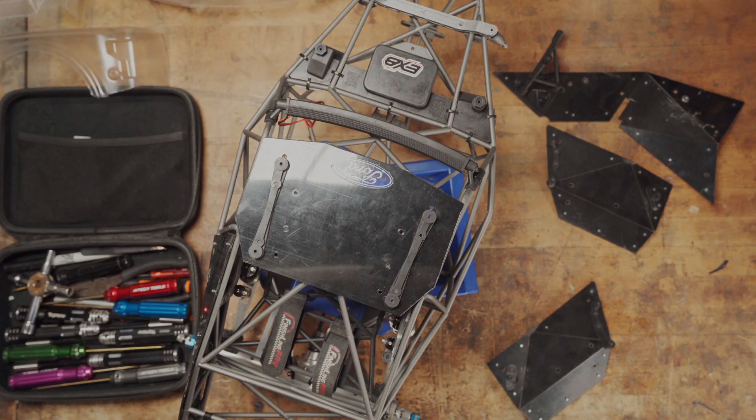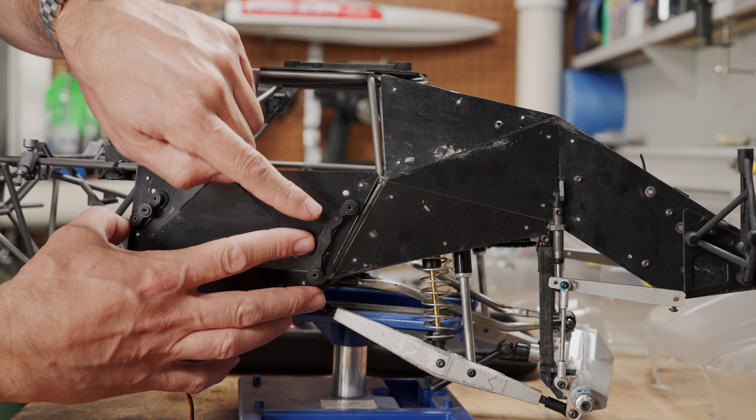Today I'm creating a middle support for the rear bedside fenders. I have the one in the back, which hopefully you've seen in my last video - if not, I'll post the link in the comments section below. And I have the one up front, more in the middle of the chassis, which mounts the cab to the cage.

But because I had to trim the body to fit my truck, I cut out all these pieces here. I'll show you in the camera above - the little intermediate mounting point got hacked off.

There are 3 major steps in my process when creating a custom 3D part for the truck. The first step is to figure out exactly where the part needs to be located on this physical surface. I need to take some basic measurements of the physical truck, so that when I move on to step 2, which is creating the 3D piece in my modeling program, I can base the measurements of the new part on the physical truck that I measured, and not the one I created in the computer, since they are slightly different.

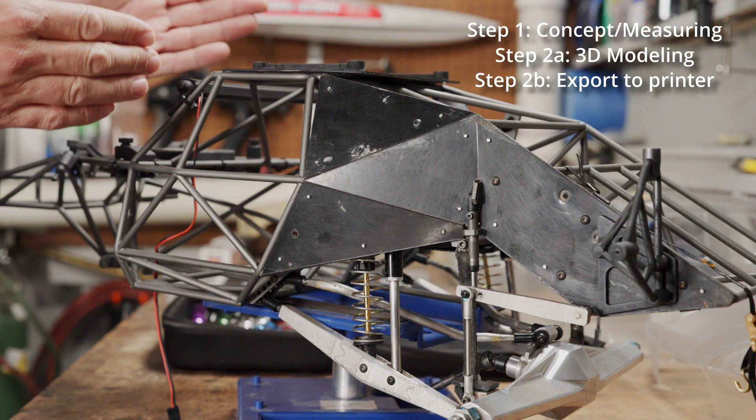Once the part is fully modeled and I'm happy with the result, I can move on to step 2b, which is to export the model from the modeling software and import it into the 3D printing software - it gets a little muddy, but stay with me here - where I create the necessary support pieces for the 3D part to be printed. That's something I'm sort of learning on the fly, and I'll try to describe that in step 2b.

From there we head back downstairs to start step 3, the 3D printing process. But before any of that can happen, I need to remount some of the black plastic panels and the body so I can measure exactly where that part needs to go.

One of the things I didn't talk about in the last video was how much longer the wheelbase was on the Baja Rey versus the Yeti Score truck. Obviously I couldn't extend my wheelbase a full inch or whatever the difference was, so I ended up doing a half inch.

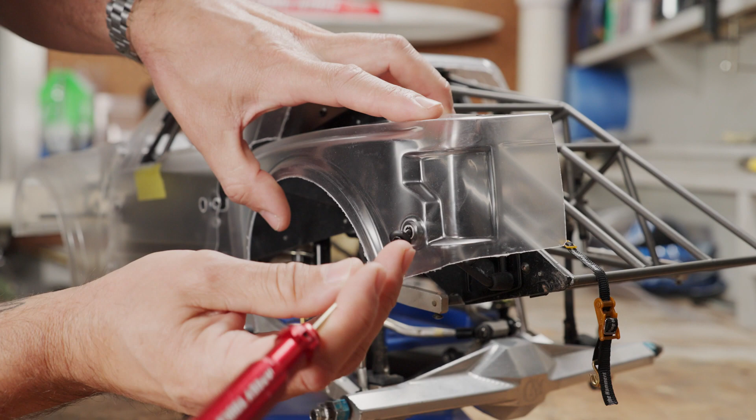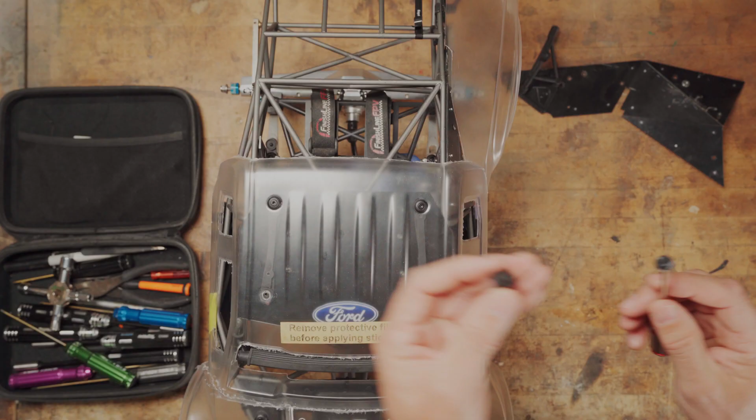So you may or may not have noticed in my last video that I don't have a specific bracket down here. What I ended up doing is take this little piece which used to be part of this top bracket, I snapped it off and I'm using it as sort of the nut behind this screw to keep the body panel secure. I didn't think it really needed a physical mounting point against the black panels. It seems pretty solid.

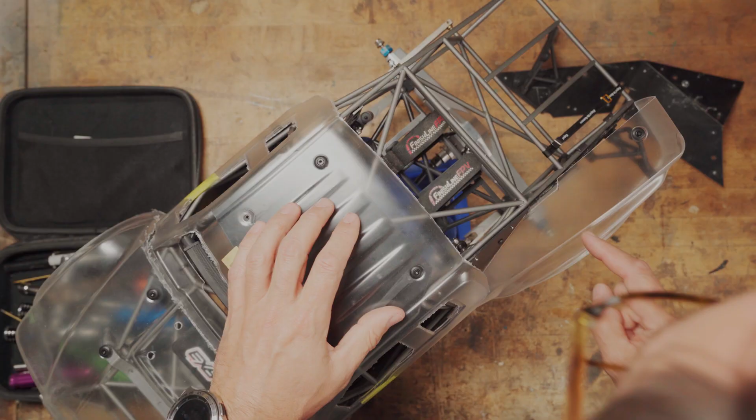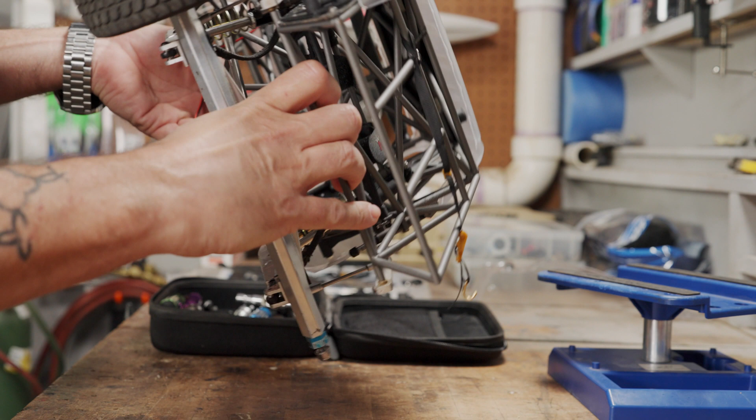So the body is mounted. Now we need to figure out exactly where this guy should be. I'm thinking I should probably put a wheel on to make sure I don't hit whatever it is that I'm going to be mounting up here. Let's see. Need to make sure that the sway bar clears whatever it is that I'm creating.

This might actually be the right spot right here. It's out of the way of the sway bar. It can come off sort of at an angle, so it would do something like that. That's one option. The other option is to come straight out of here and go in that zone. Problem there is that I'm worried that whatever I make is going to end up hitting that.

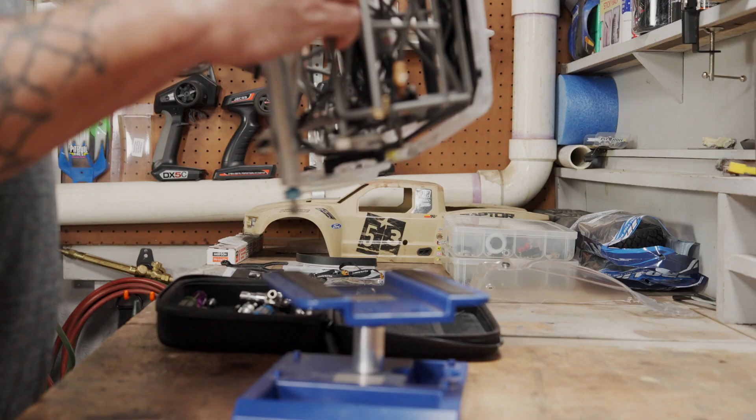I think this is the right one. I think that's a good spot. Let's go with that.

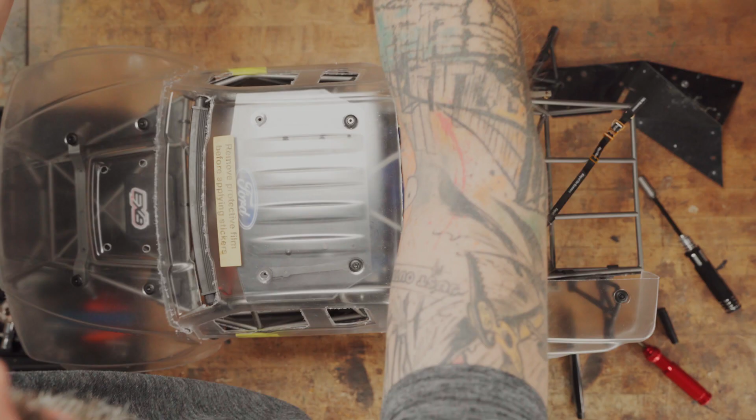All right, so let's talk about measurements. It's not going to be super critical because there's no specific hole that I have to figure out how to get to. These holes were already in the body, so it was important that as I developed the new piece, these holes lined up as close as possible, and same with all of these other ones. The only other two holes that I created new were these guys, but these were existing. The ones in the front on the hood are existing, and the ones on the roof are existing, obviously. So now I can create a piece that lands in this zone, and I'll just create a new hole. That should be easy enough.

So we're going to say it needs to be roughly 18 millimeters, 18 millimeters this way. And we're going to say it needs to be—pen's not working here—if that's the line of the crossbar, it needs to be roughly 17 millimeters from there. All right, simple as that.

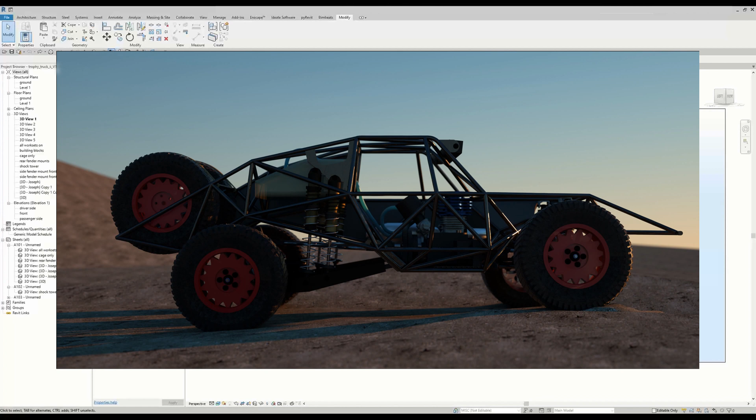All right, so we are up in the office, and for those of you who aren't familiar with this program, this is Autodesk Revit, Revit 19. This particular view was created when I was doing the early studies for the renderings I was creating when I was doing the design of the truck. If you haven't seen those renderings, I have them in one of my videos—I'll link it up at some point. Let's move over to a more utilitarian view.

So you can see I started to create some of these pieces, the newer 3D modeling pieces in here. Basically what I do is try to work in the truck file as much as possible so that when I create these new pieces, I can see how they lay out on the skin or on the black panels of the truck. For those of you wondering, I created every little thing in here. I even have a nitro engine that I downloaded from OS, and then I added all the gearing and so forth. This is modeled after Metal Concepts.

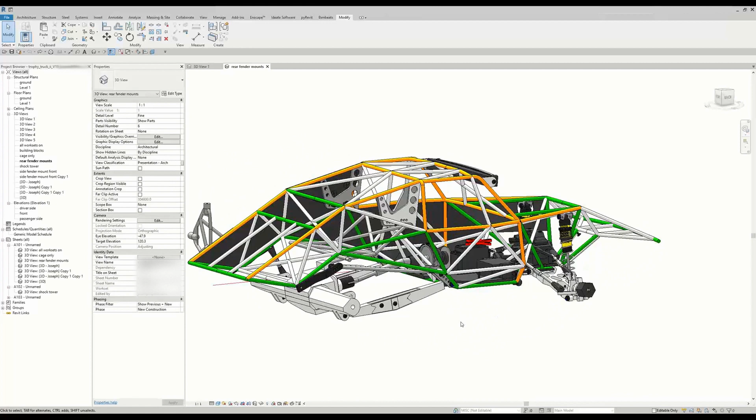This is modeled after some eBay front control arms. This is all modeled on pieces and parts that I bought as I was building the truck, before I even started assembling it in the wood dowel configuration. This was all way before that. I built the entire thing in the computer based on parts I had already bought, but I didn't actually have a working physical model yet—it was all done in the computer.

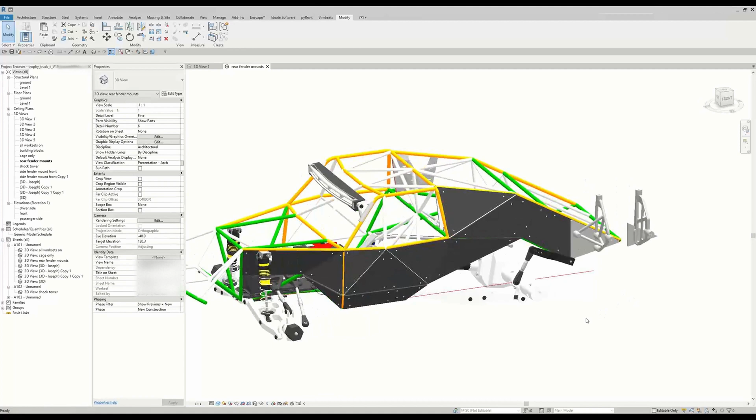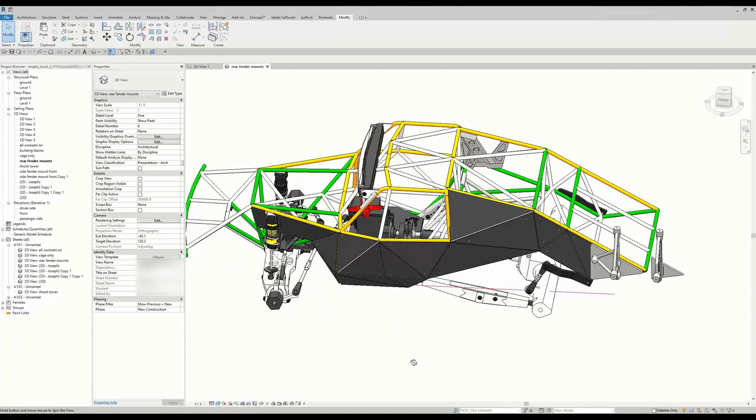Anyway, so let's quickly go through the process. This is going to be more of a demonstration, not a tutorial on how to create these pieces and parts in Revit. There's probably one other person watching this video who does Revit, and if that person is creating an RC trophy truck, feel free to reach out to me separately, but I don't want to bore everybody else with Revit how-tos. I will, however, go through my process.

If you remember in the first part of the video, we talked about the part being on this panel here. It's going to be 17 millimeters forward of this green crossbar. And then I remeasured it based on having the body in the position I want, and I want to go 20 millimeters off the skin.

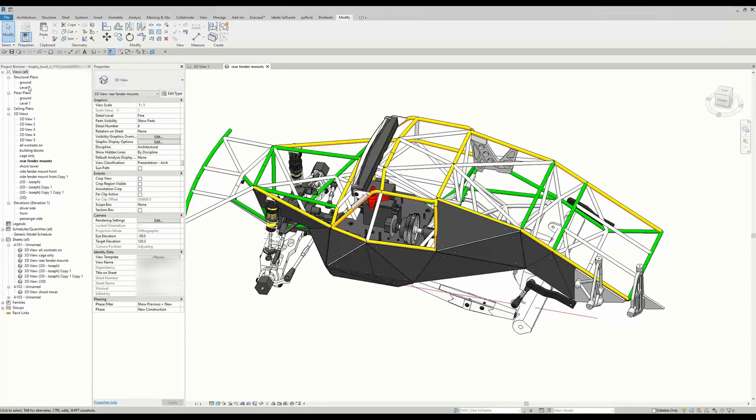But the first thing I want to do is give myself a reference plane to work on. So I'm just going to create a new component, which is what Revit calls their individual families or components, and it's going to be a generic model. We'll select this, and I'm going to do an extrusion so I can get a block in the model to work with.

I use it for various working planes, and I'll show you as I go through. Right now it's set to 3 millimeter high. We're going to do a 150 millimeter high extrusion, and we'll see how that looks once it's extruded.

All right, so we'll spin this guy around, look in the front. It's probably not a bad spot, but we can raise it up. Essentially, I was trying to get it where the body is going to sit. And you can see back here that this was sort of an early version of the rear bracket.

If you guys see my mouse, I don't have the cool app that follows my mouse, so you guys have to bear with me. I'm just recording this on GoToMeeting.

This was an earlier version and was really high, and you can see how high the panel was. I've lowered it down significantly since. I think the top of the mounting point is down at the bottom where it's shown here, so it dropped almost a half an inch.

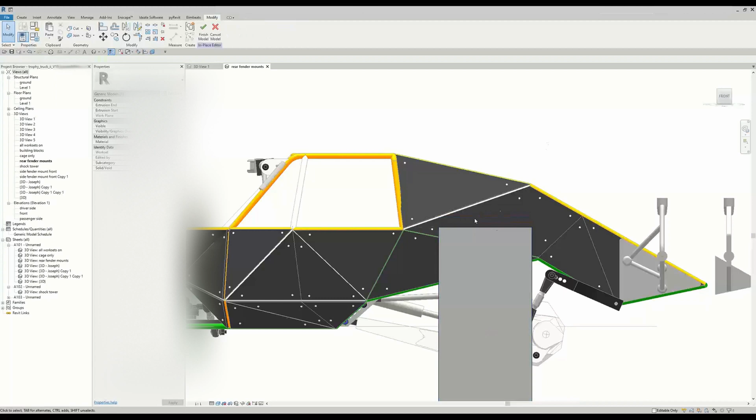So we're just going to hold this new bracket in this zone. Yeah, maybe we'll drop it down a little bit. I'm not quite sure I'm comfortable with that, but again, as we talked about earlier, it doesn't have to be really precise, since I'm creating a whole new hole in the body panel. So I just need to roughly get it where I want it to be.

So we can actually use the edge of this box and align it with this crossbar, so I know what the center of that crossbar is. Revit sort of snaps to it, for those of you who don't know.

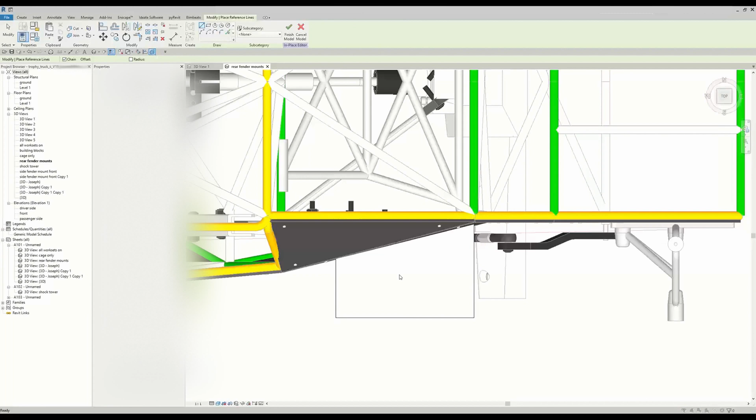And then the other thing I need to do is create a line, a couple reference lines. The reason I do that is so I can remember where I want to be: 17 millimeters forward, 20 millimeters off. And I'm going to create that reference line on this plane.

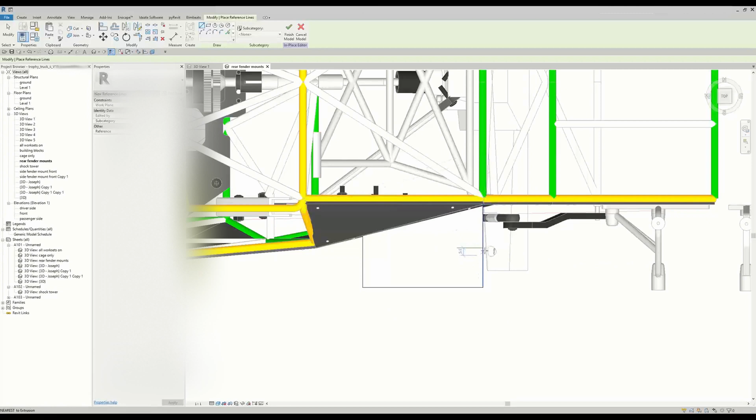So if you rotate, you can see I'm selecting this plane to begin to draw on. We'll go back to the top view, which architects and engineers call plan view. We'll create a new reference line, and that reference line is going to be 17 millimeters forward of that edge, or of the center of this crossbar, which is this edge of this block, square, cube, whatever.

Then the other thing I want to do is create a 20 millimeter perpendicular to that black panel. Now I know this needs to be 17, so I can actually move this 17 millimeters to that intersection, or to that endpoint, and then take both of them. Well, let's see, is that the best way to do it? Because I need to move parallel, so let's not do it that way.

I'm going to draw another one there, and then I can draw another reference line from here perpendicular to the one that's highlighted. Now I need to move this line to that intersection. So now I know that the end of this line, which is 20 millimeters off the black panel, is 17 millimeters forward of that green tube.

So let's draw, I think what we'll do is draw a little circle here at that intersection. That's the hole that I need to drill in the new bracket, or the hole I need to create in the new bracket where the body is going to mount up.

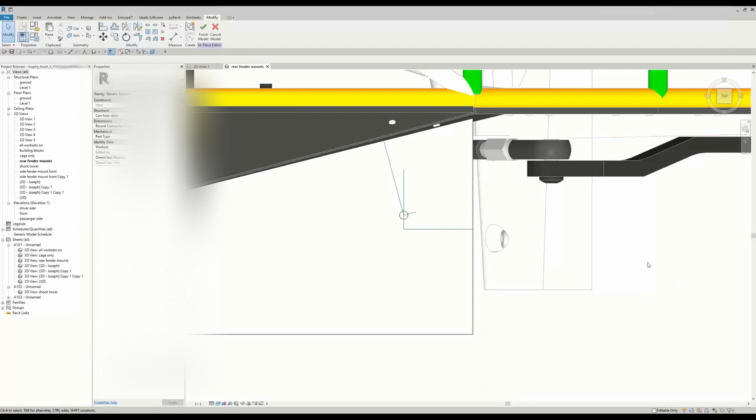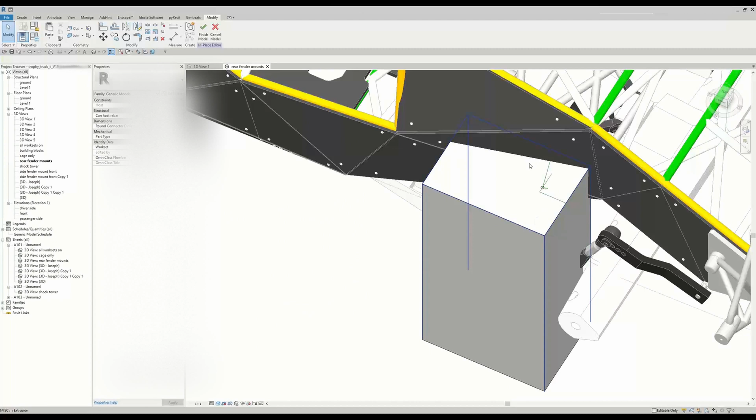Hopefully that wasn't too confusing, a little convoluted, but that's just the process on how I create these things. There's a lot of other programs out there like SolidWorks, Blender, I'm sure there's a ton of other things out there, but this is what I know, this is what I use, and I'm pretty efficient in it. So that's just the best way for me to actually get this stuff done.

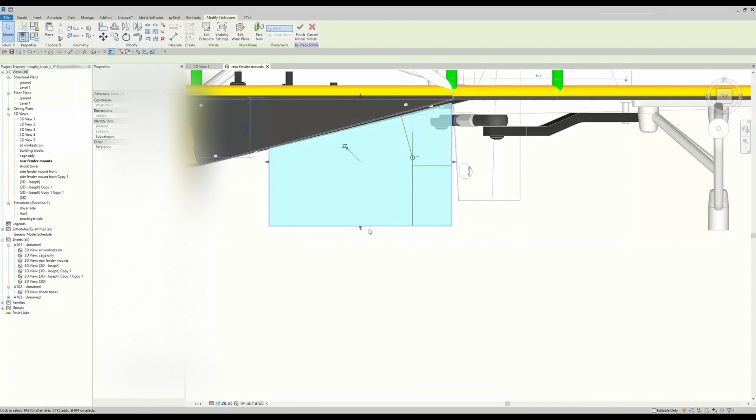At this point in the video, it's probably best that I do more or less a time-lapse illustrating how I go about creating this piece, without boring you with all the very specific details of how to do this in Revit, since most of you probably aren't using Revit anyway. I'll slow down towards the end so we can wrap up this portion of the process and talk about how it all came together.

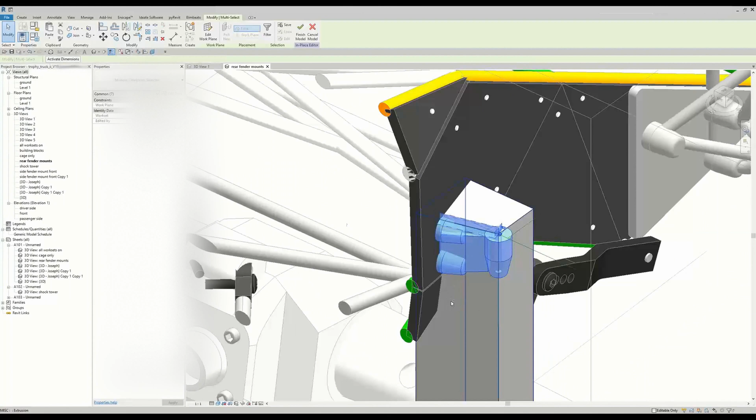Cut me some slack, people are listening. Or maybe you're all asleep by now, I don't know. I probably would be.

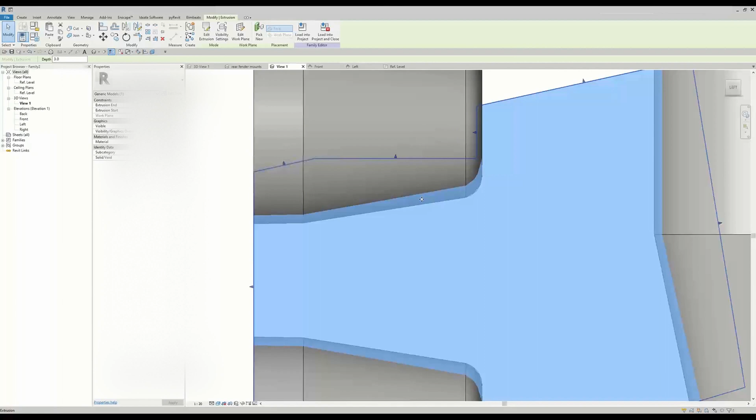All right, now can I join them? Nope. All right, doesn't matter, the 3D printing software sort of figures all that out anyway.

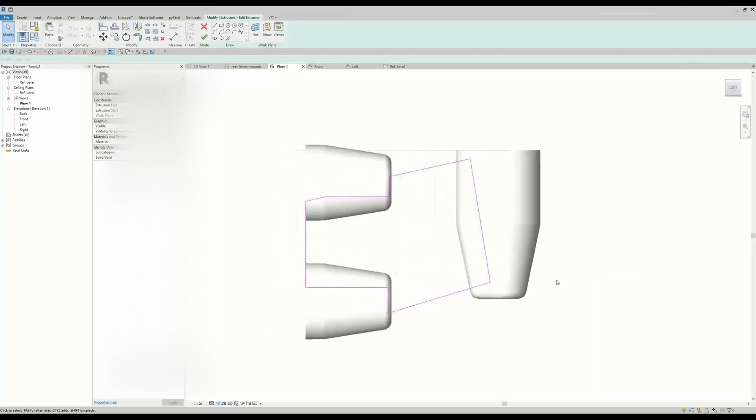What may need to happen, looking at it again, is that's not high enough to clear this. So I'm going to bring this way down, and then I'm going to redo this so that it intersects that. That probably makes more sense.

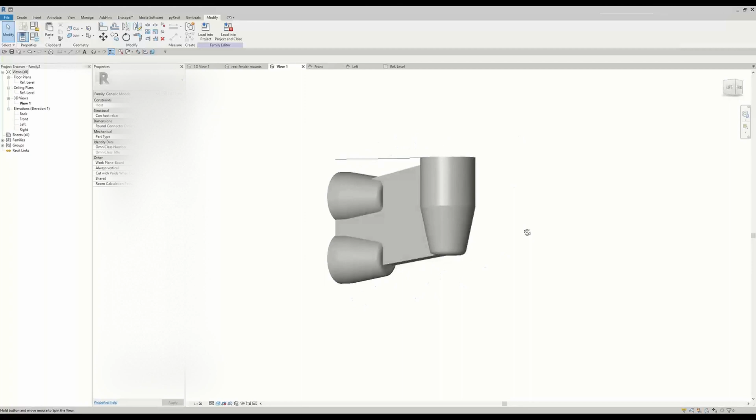Now that we have this built, I can export it. I need to clean up some more intersections and whatnot, but I can export this into my 3D printing software, and we can tweak it from there, put in any supports that we need - which I don't think we're going to need. This will probably be the bottom when I print it, so that's not going to need to be supported, and that's not going to need to be supported either. I think it's probably going to be okay the way it is.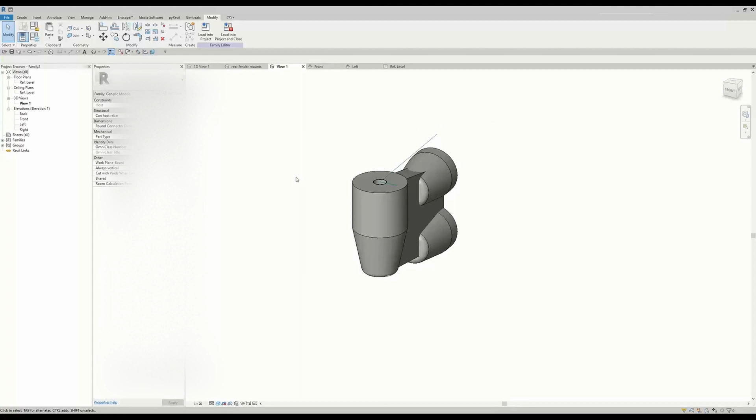All right, hopefully that wasn't too painful. I'll probably have done a few time-lapses in there because I was just kind of toying around trying to figure it out. But that's the process, and hopefully you learned something or at least found it somewhat interesting.

So we've moved over to the Mac. Revit is a PC program, so in order for me to continue working in Revit, I've got to use a PC for that, but for everything else, I do Mac.

Let's open up - so I actually did do some more refinements. I mean, I was going to bore you guys to tears if I kept going with what I was sort of doing as I was talking to myself. So here's the revised and updated fender mount.

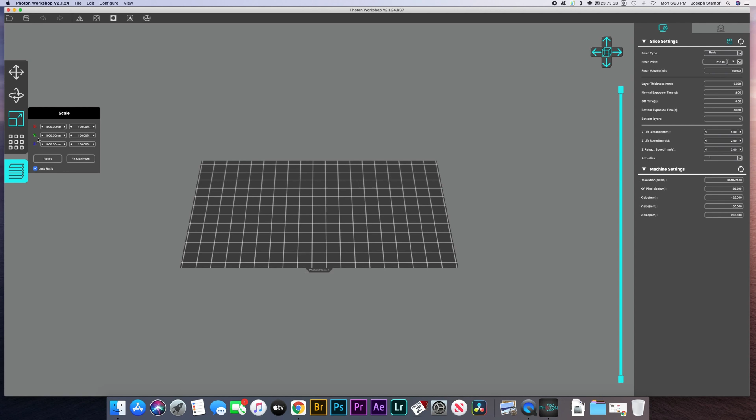So we'll open this guy up. We need to scale it, and just for showing you the process, this is where I landed.

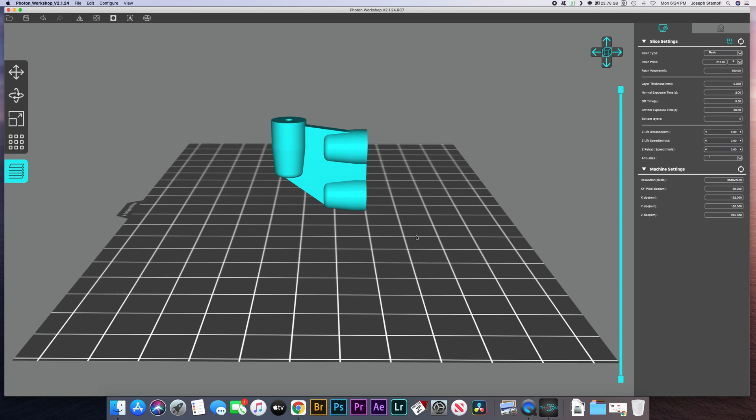This is the program that I use that comes with, or is part of, the Anycubic line - the Photon Workshop, I think that's what it's called. This is the only one I've ever used, so I can't compare it to others. But basically, I need to bring the model, the STL file, into this program.

This is where I would create supports. I can mirror it, rotate it, do a bunch of stuff to it. Normally, if you had to create supports for something, you could come in here and define what that support looks like, then click on it, and it creates like a little foot with a little arm that helps support it.

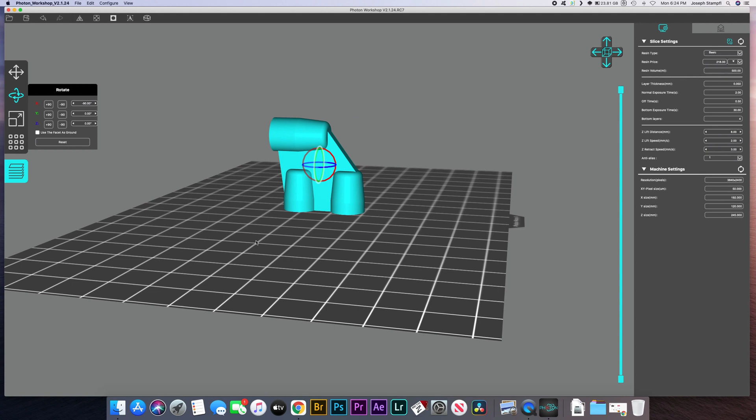In this case, we don't need to do that because I'm going to rotate it along the red axis, -90, basically just like that. This is the build platform, and I really don't think I need any supports. Maybe there would be a support to hold this guy up, but we're talking like a 0.5 millimeter, so I don't think it needs it much.

So what I do need to do is duplicate it. I'll grab this guy, and we'll put it right there.

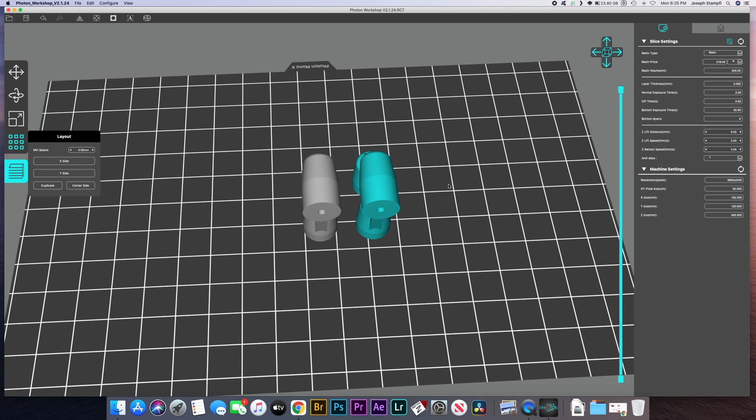And that's really it, not much to show you here, which is good because I'm sure you're bored already. So we'll go to the slicing icon, and I'm going to put it in the slice folder. I know this is all riveting.

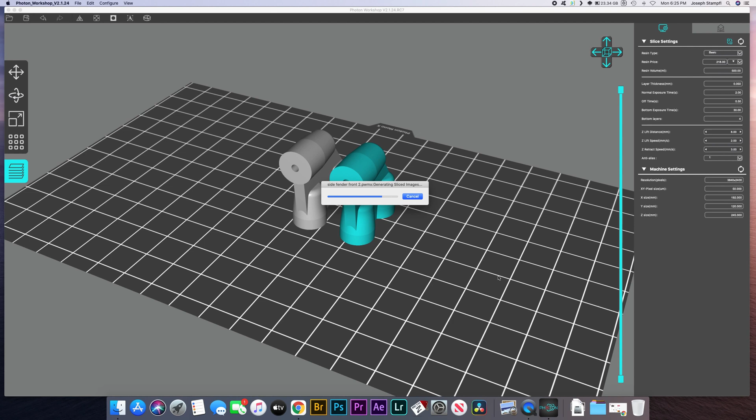And we'll slice it, and it's going to tell us approximately how long it's going to take to print. Now, I don't know that the scale is 100% correct. I think it was roughly 20 or 30 millimeters tall, but just for demonstration purposes, this is what happens. We'll get about 1 hour and 57 minutes. It's probably a little big because I don't think it's going to take that long.

And you can preview it, and this shows you how it slices it, so as it goes through the process, all the different slices.

Boom, done. All right, let's head back downstairs to the workshop area. I've got the 3D printer and the curing machine down there, and I'll describe that process, and we can print this up and see how it turns out.

All right, so we are downstairs, right next to the workbench where the truck is, where I do all of my hobby stuff. I've got my little 3D printer set up here. I think you guys can see this over here. This is the washer and curing unit, and then this is the Anycubic Photon Mono X.

And the reason I went with this one is because it's got a 4K LCD screen. I think that's LCD, right? And it's got a bit higher resolution, so when printing these parts you don't see a lot of the lines for the layers that it creates.

Working with resin has been quite a bit of a learning curve. I think I'm getting better at it now. There's certainly a lot more cleanup after every print. You have to deal with the resin on top of the build plate, the resin that lands all over the place when you try to wipe it off and so forth. But for the most part, it's been very rewarding, and obviously I've been going nuts with that.

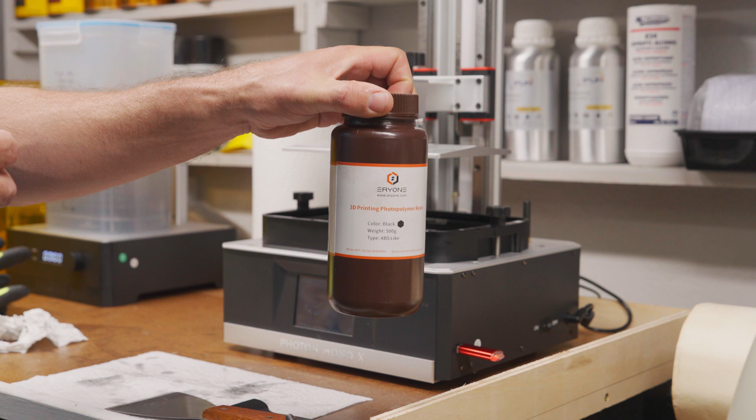I'm printing in black. I like black because when I spray it with a silver paint, it really has a deep silver luster to it, versus the gray resin. I don't know, it's just too poppy. It doesn't feel like it's got that deep look to it. Anyway, so I'm sticking with black, and I think black works for all of this stuff anyways.

Let's see, what else? I think that's it for now. We'll go ahead and print. I'm going to do a time lapse. I think it's like an hour and 20 minute print. I forget exactly what it was, but it's going to take a while.

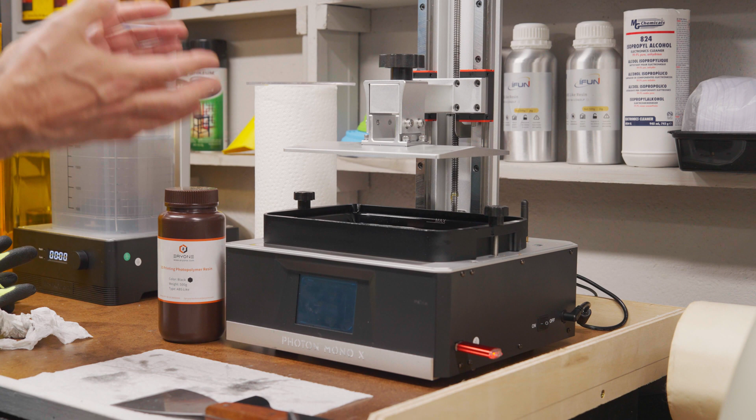And then when it's all finished, I'll come back and we'll talk through the process of peeling it off the build plate, sticking it in the washer, and then curing it with the LEDs. So with that, let's put the lid on.

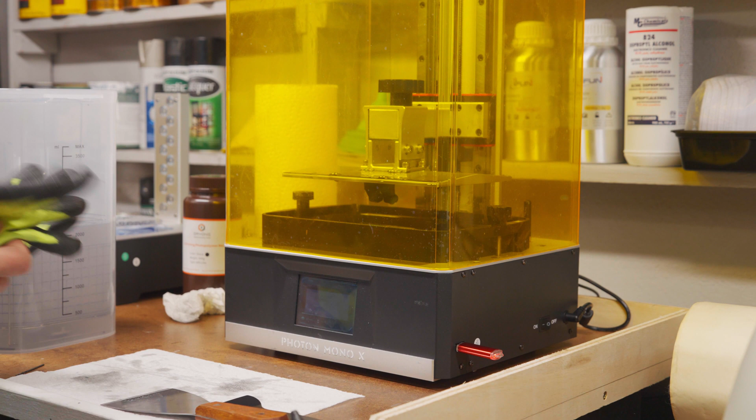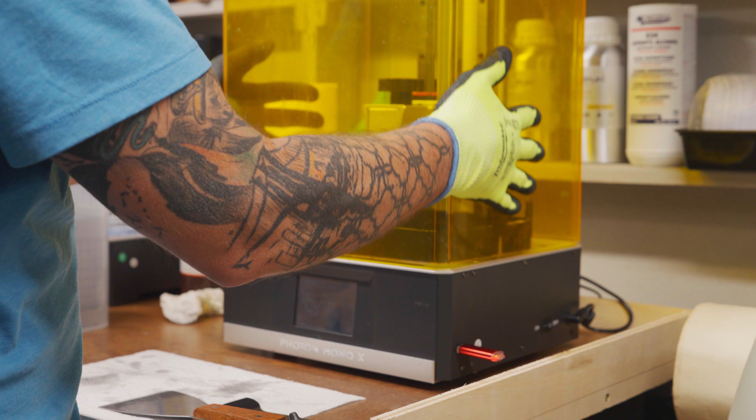Talked about these painter's gloves before. I like them a lot better than the disposable gloves for a couple reasons. One, they're not disposable, so you're not being as wasteful. And two, my hands can breathe in these. The disposable ones, my hands get super sweaty, which is probably way too much information for you guys, but that's the truth of it.

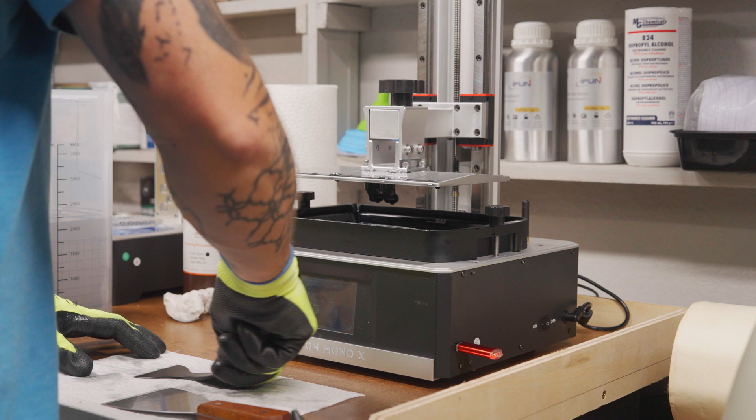All right, cover's off. Very stinky, but so that you guys can hear what I'm saying - not that you really want to hear what I'm saying - let me turn the exhaust fan off.

Alright, so here's the process, and I'm sure there's a lot of different ways of doing this, but you've got to get it all off the top so it doesn't leak all over the place when you pick it up. There's really just no clean way of doing this, I don't think. I think if you don't put so much resin in the reservoir, or whatever we call this black container, maybe it won't get so much on top, but I want to make sure I have enough for what I'm doing.

Alright, so this build plate is secured just on the top, and then it slides right off. If you guys can see that, there's our new pieces. Looks pretty good. A successful print.

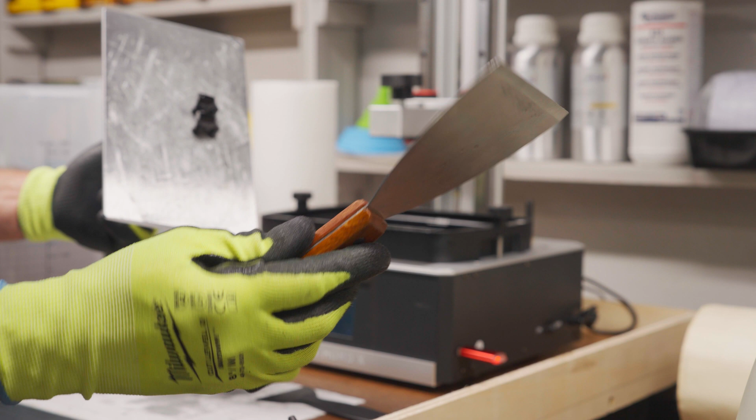Alright, let me see. So that's what it looks like. It's stuck to the plate. I've got to kind of chisel them off the plate. They give you this really nice sharp spatula with the kit.

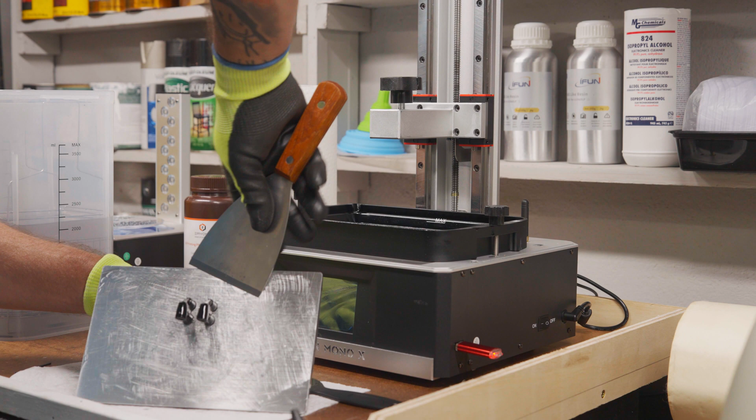And there's no graceful way of doing this. In fact, I'm not even sure how I'm going to do it so that you can see it. But there it is. Kind of snap off. So this is a container of IPA, isopropyl alcohol.

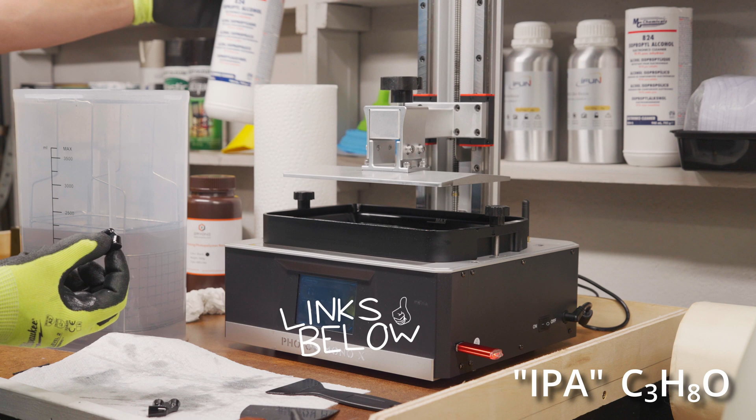Isopropyl alcohol. Basically it's like 120 proof rubbing alcohol. So put it in there. I usually pull my gloves off after this point. Let me rotate the camera around so you guys can see what I'm doing here, and we'll go over here.

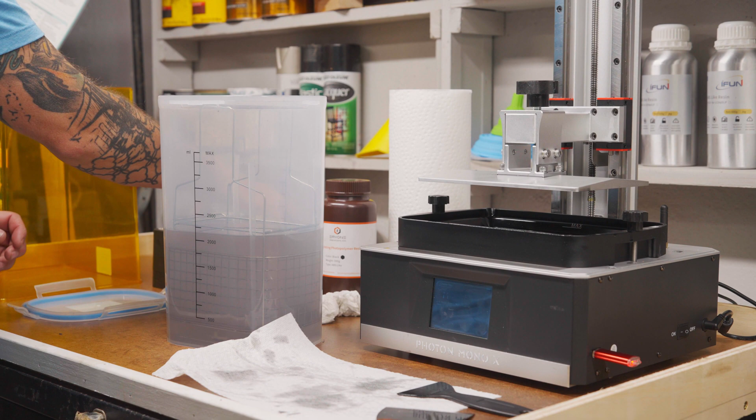That guy comes off, this guy goes on. We'll let this wash. It's got a little magnetic spinner in there, and it'll help circulate the alcohol. We'll let it wash for 8 minutes, and then we'll come back and check on it.

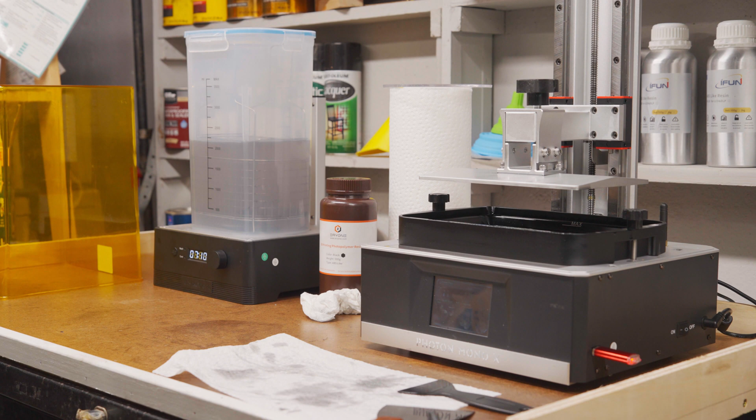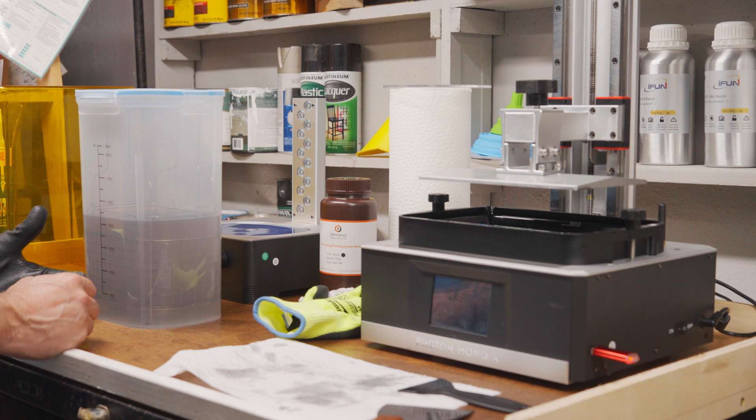So you may have noticed the magnetic little spinning thing stops every minute and then reverses. And if you're wondering why the liquid is kind of a grayish color, it's because I've been doing so much black resin. Ultimately I need to take the cage out and put the whole plastic container out in the sun so the UV rays can turn any residual resin in here that's been washed off into a solid product. Then I can strain that product out and have a relatively clean alcohol solution again.

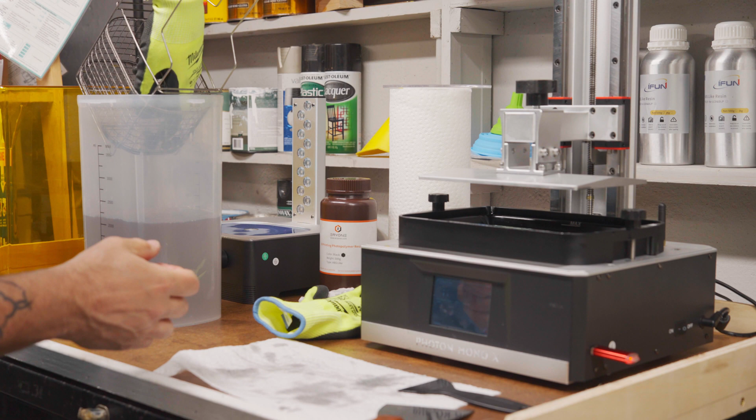So we're going to pull this guy out, grab our little parts, and I just use compressed air and blow them off.

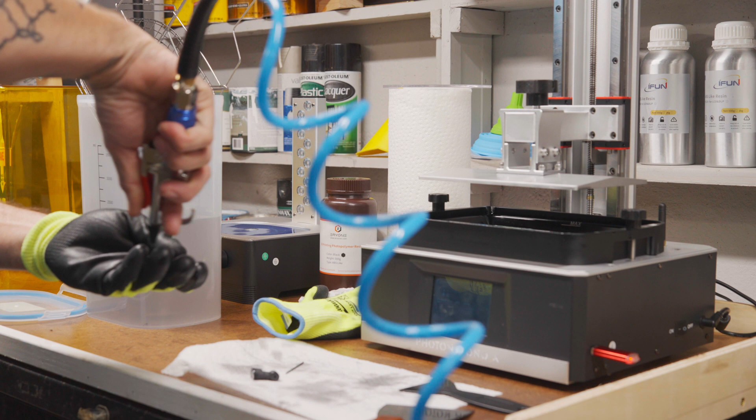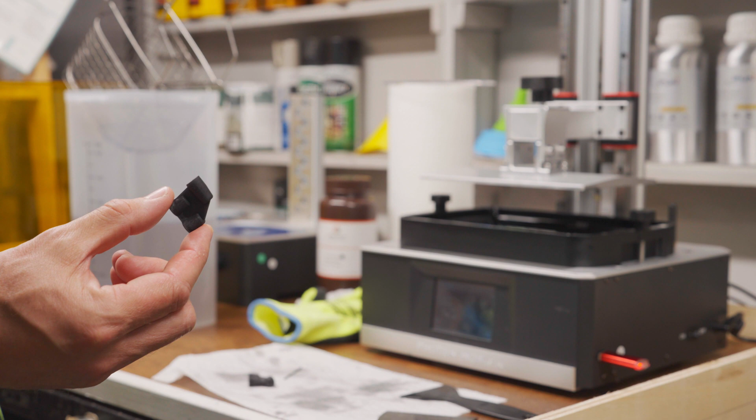Let's see if I can focus in on this guy. Closer. A little hard to see, but I think you get the general idea. It's a small little piece.

So the next step is the curing process. Not done yet, let me get this guy out of the way.

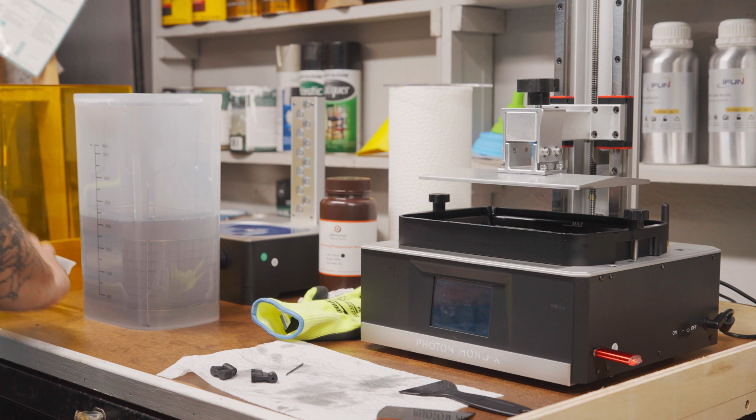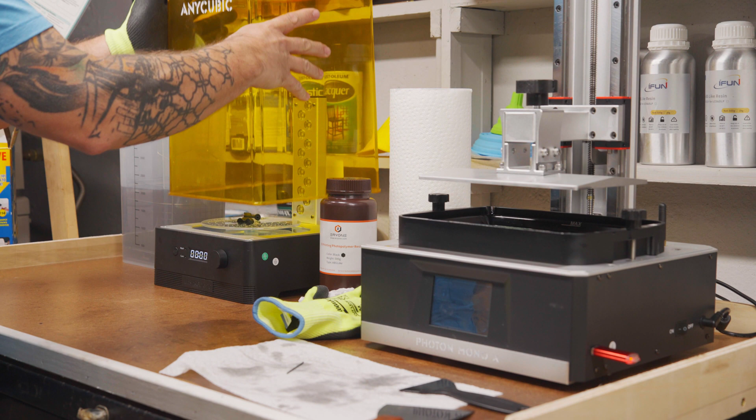A little rotating table, change the mode to cure. Throw these guys on there. Come on. We'll let these guys go for another 10 minutes -- 8 minutes, I guess, in this case.

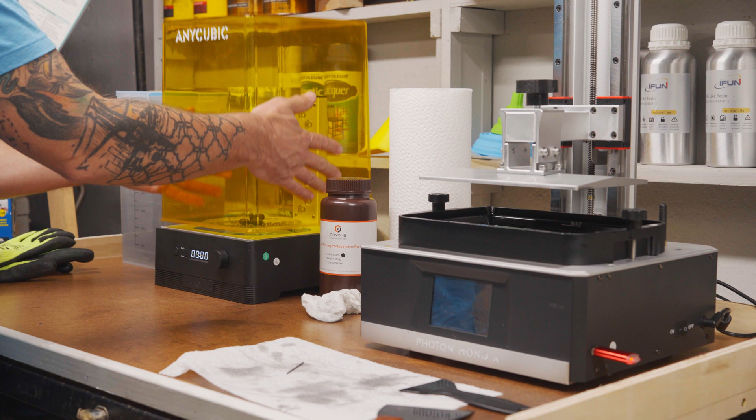All right, I think that's more or less it for this process. We'll move back over to the workbench with the truck and we'll get this thing fitted up, see if it works.

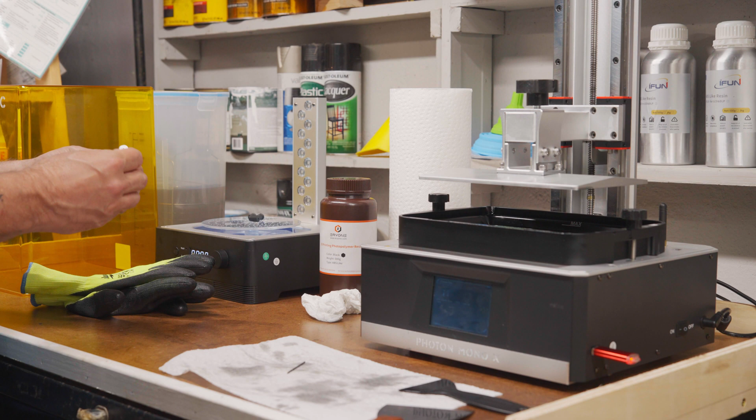All right, we are on the home stretch. Actually, to be totally honest, I've already done one of these guys. I mounted it up. I wanted to make sure that I knew the process and how I could efficiently show you this, since this video is probably the longest video I've ever done.

So just to go through the process, I marked up that same 17mm spread off of the crossbar that we talked about earlier in the video. It pretty much fit right exactly where we had planned it.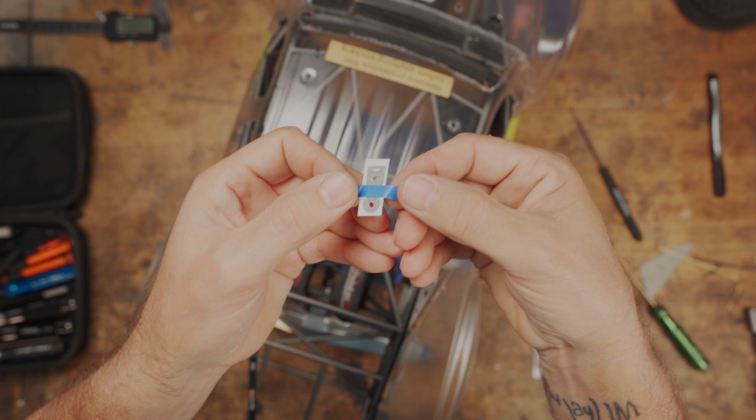The way I've done this in the past, and the way I did it here, and it was very successful, is I have the ability to print a little 2D version. I don't know if you guys can see that -- a little 2D version of the part and how it's going to go up against the chassis. That allows me to have the perfect hole spacing, so I don't have to guess, since I won't be able to see the holes when I'm putting it up against, and I don't have to measure.

I print it, glue the part to the tape with just a tiny dab of super glue, and then when I get this up against the black plastic panel, I can stick the tape on the panel, pull the part off the tape, and put the holes right there on the panel. That's the process. I've done it a few different times on different parts, and we can do that again here.

I'll flip this guy over on the side so we can see where this thing needs to go. So it's going to go in that zone right there. Just got to make sure it's flat up against the body.

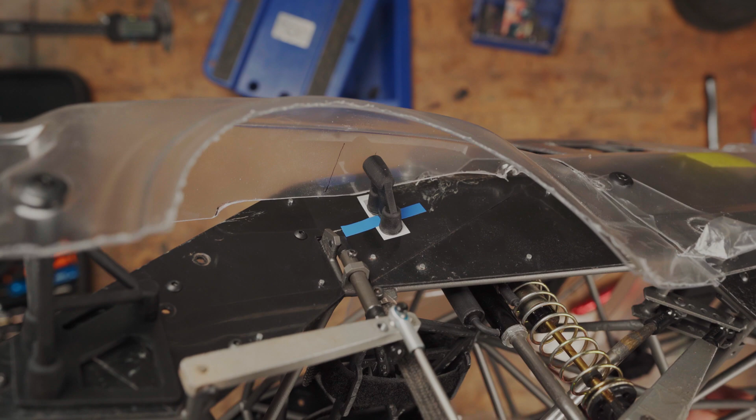All right, looks pretty good. Let's see if you can see that up in there. Looks pretty vertical. I think there's really no perfect spot for it.

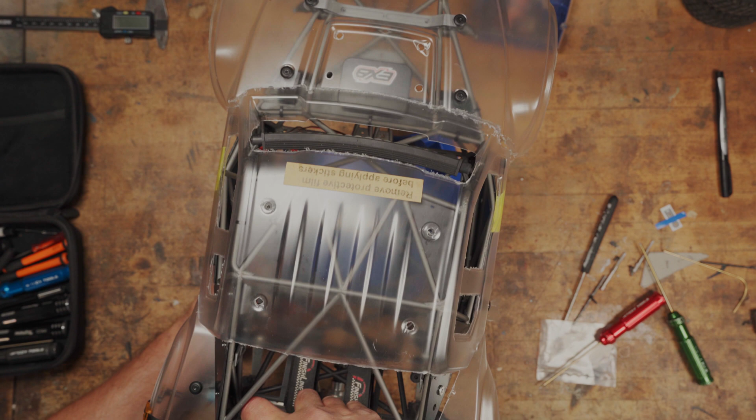The goal, yeah, you really can't see it here -- let's put it back on the stand. The goal is just to make sure that they're sort of symmetrical. I don't want them to be so far off that it not only looks weird, but then it throws me off when I'm making a new body or fitting a new body. So they're roughly in the same spot. The goal was to be 17 mil off of this crossbar here, and I think that we've got that.

I don't know, do I do the hole first? Mount it first? I think we mount it first. Actually, you know what? I think if we press on it, we can actually get a pretty accurate hole here. So let's put that there.

I think we'll be okay. Let's start the process. Oops, I already messed it up. Let's see.

Tape didn't hold very well. All right, so we're going to pull the panel off now so that I can get access to the bracket and make sure that tape sticks to the panel.

In between all of the filming that I was doing, I remade these rear fender supports. I wasn't totally happy with where they were, how high the fenders were sitting relative to the truck chassis. You guys see that? So let's press that down real good.

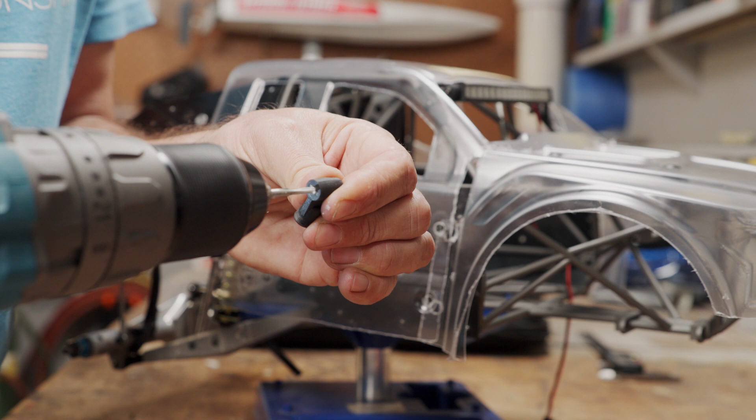All right, so these are significantly shorter, and I just sort of hold this pretty light in my hand, so when this starts to bottom out, I just let go. I don't want to strip all the threads right out of it. Just like that.

Alright, that's good to go. Let me get a little compressed air here.

Unfortunately the only way for me to get the nuts on the back is I've got to pull this panel off. So bear with me, do a little elevator music for you. Oops, that one dropped.

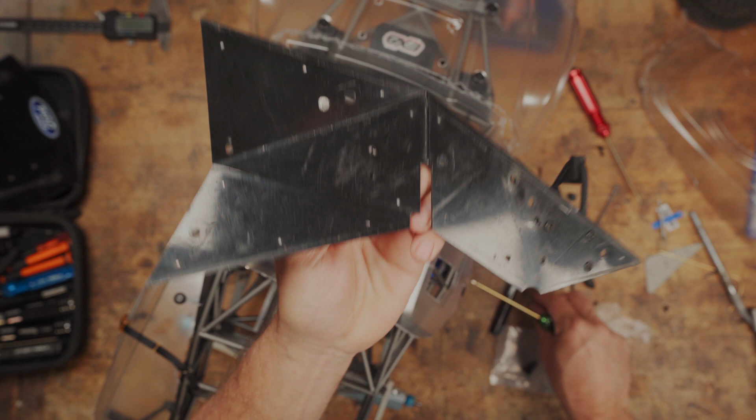Like I said, this method's worked pretty well for me in the past. The only time it hasn't worked is when I screw up the hole because I was being too impatient. But I think we're pretty good.

We'll start. Yeah, I spoke too soon, huh? A little snug.

It doesn't help that the holes that I drilled in the black panel are 3 mil, so it's sort of self-tapping into the panel as well. Alright, there she is. Let's get this thing back on here.

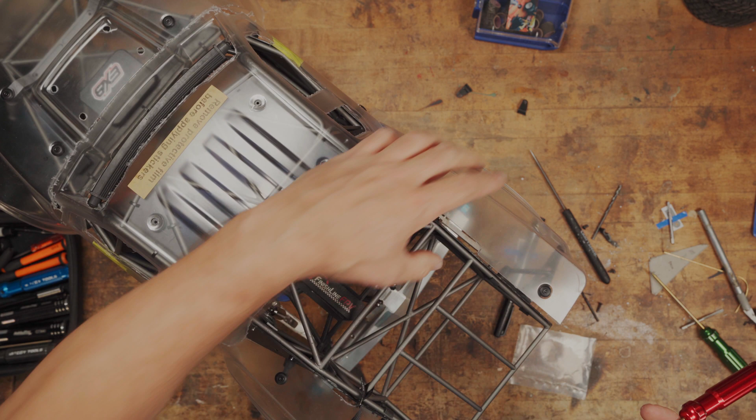Last one. For those of you with a keen eye, yes, the gap here is massive. This was the first panel I cut very, very early on when I was trying to get the fenders sort of fitted. This gap's much better. This is a massive gap. You know, this first one, bound to be some bigger gaps. Anyway, there it is.

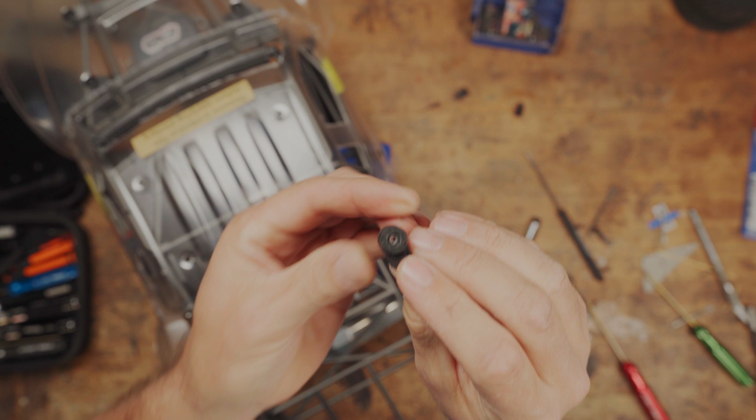What I'm realizing now is that these little spacers with that little nub on the bottom are meant to fit down in a hole, and I do all of these flat. I used to do them with a hole. I don't know if you guys, let's see if it'll zoom. I used to do it with a big fat hole so that this would actually just sort of fit right down in there like it's supposed to. But I got lazy because I didn't think it was necessary. But now I see, with something like that, it would help get past the thickness of the body and seat down in there. But I've seen some of these get really nice and tight. Maybe it's because certain parts of the Lexan are thicker than others. But I don't know, I think you get the idea.

Alright, let's see, can I show you? Probably not, can't see it there. There it is, see it?